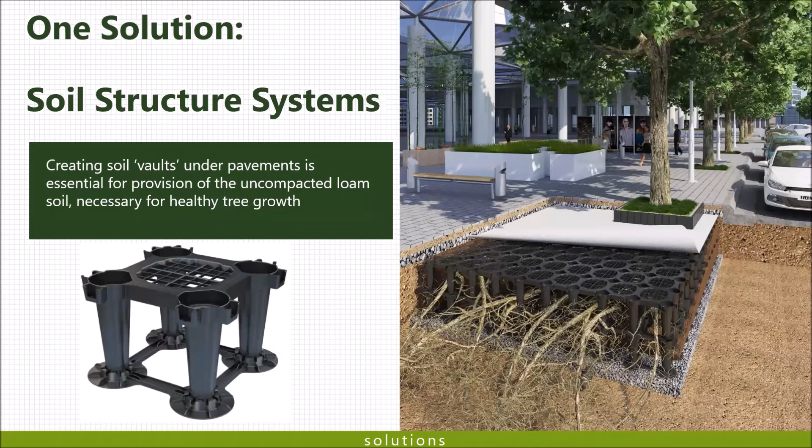So this is our soil cell product here. This is a Stratavault 30. As you can see, this product sits underneath the sidewalk or underneath the road, and it's a structural product. It also has void space within the modules, within the matrix, and this void space is for soil for the trees to use, so their roots can spread throughout the soil.

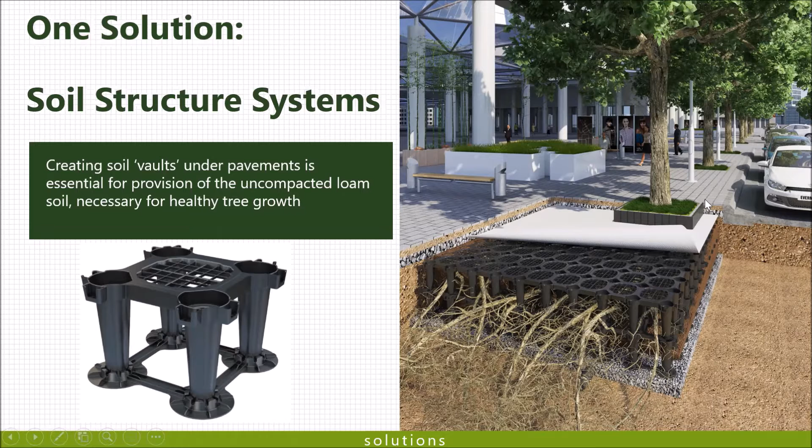Now, as mentioned before, we had a 4 foot by 4 foot square hole in the sidewalk. With the use of our system, we're actually providing sometimes 500, sometimes 1,000 cubic feet of soil per tree within these systems, which means these trees are now going to grow from a 3 to 5 year life expectancy to 50 to 70 years.

So it's a pretty simple concept. They are literally just, if you want to call them, plastic milk crates that have structural capability of supporting the sidewalk with a void space within them.

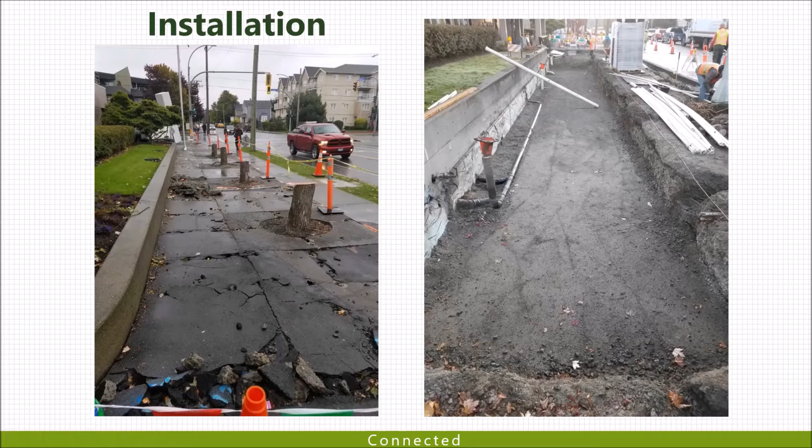Image on the left, our base plates are down. That's the first thing that happens here. And then we add the actual product into the base plate, as you can see there.

Okay, and we keep going. We have bridge connectors, and eventually it becomes here what you see on the right hand side. So this is one complete layer of soil cells now, and the square holes are there.

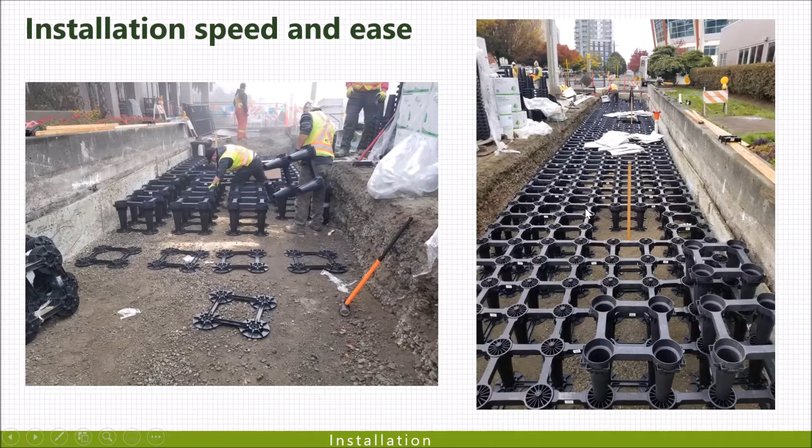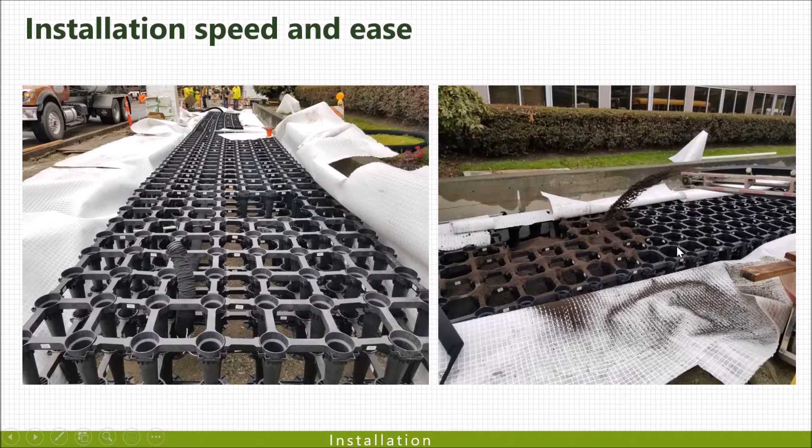Now the image on the left completes the Stratavault 30 installation. The top grates are in place now, and again this square is where the tree will be going. And now what we've done is, because we've filled it with soil, we've folded the geotextile membrane over the top, and there's a 12-inch overlap here. This is now ready for us to pour the granular gravel layer on top of this and compact it.

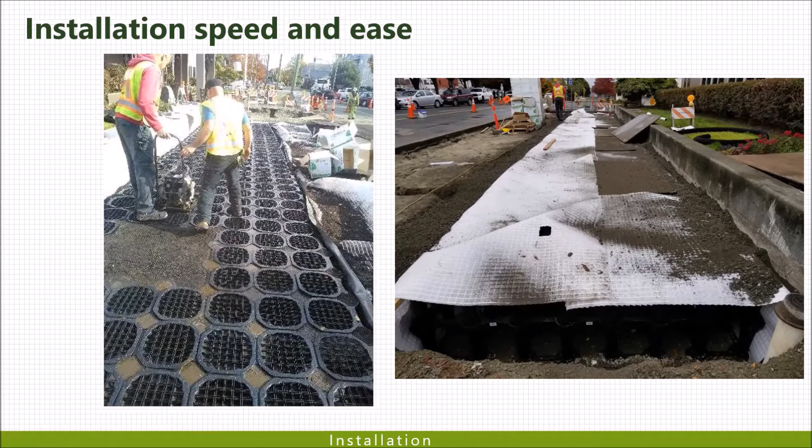So that is just what we've done. Here's the granular layer on top, and this is again about 4 inches of granular compacted to 98%. And then the image on the right is the project now completed. We've only put 2 trees back into space because the canopy of these trees are going to far exceed the 4 that were there before, so we don't need as many trees.

And just to go through the idea of why we use these soil cells again, this 4 foot by 4 foot tree grill here was the way that we used to plant trees into sidewalks. I say used to, we're still doing it now in some municipalities. But now instead of this, these tree roots have got all of this room here, all the way underneath this massive sidewalk, and this is all full of soil. So these trees can now expand through all of this, and that means their canopy can grow and the tree can grow to live to be a fully mature tree, providing all of the shade, aesthetics and health benefits that we require it to.

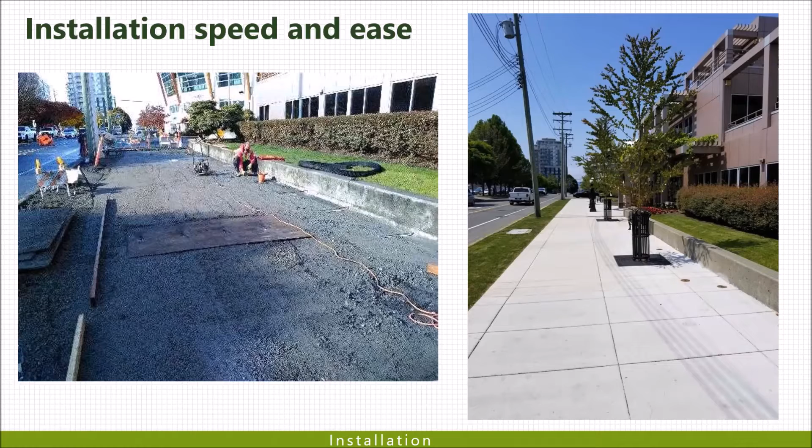Okay, now I'm going to look at stormwater management quickly here as well. For those of you that are really getting started on the whole soil cells for trees concept, you can even potentially close your ears at this point.

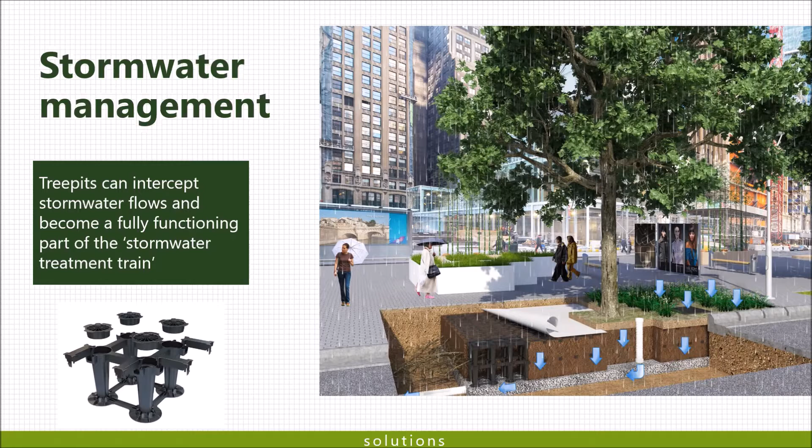But this is a really interesting development that's been happening over the last few years. So we are actually sending our stormwater - we've got lots of stormwater on this road here. Obviously it picks up lots of oils, metals and petroleum pollutants. And what we've been doing now for a few years is sending this stormwater into our catch basins. The catch basin might be against the curb, or it might be in the center of the road, doesn't matter, it just depends on the municipality. We've been sending that stormwater down into the catch basins and then eventually into our city systems, into our rivers, oceans, which is causing big problems.

A, because the water is typically got some pollutants in it, so we're sending all this polluted water into our city systems and into our oceans and rivers. But also a lot of times the pressure that's going in because of the heavy rainfalls we're getting, we're actually blocking up the pipes or applying too much pressure, where we actually see manhole covers flying into the sky. I've seen it happen a couple of times up here in Canada certainly, and I'm sure it happens down there a lot in the States.

So what we've developed is a way of sending the water through the catch basin into pipes which lead into our soil cell systems. And again, this is a win-win. There's 2 reasons why we do this. The polluted stormwater that's coming through these pipes is, A, feeding the trees, so the trees can keep getting water and keep growing, and B, the soil and the tree roots are actually cleaning all of the pollutants out of the stormwater. So it's a really fantastic natural way of cleaning this polluted stormwater.

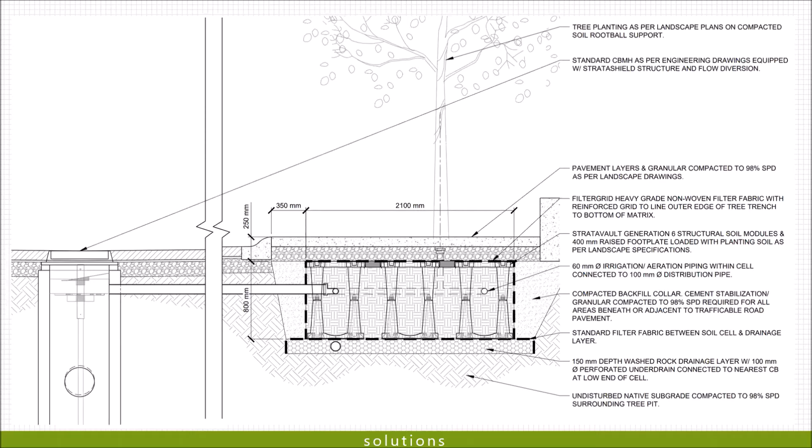We've got another system I'm not going to talk about today, which takes the silts and sediments out of the stormwater before it reaches this pipe. This system will be sold by Cascade Geosynthetics, so I don't have time today to talk about it, but if you have questions afterwards, certainly ask. The concept is we run all this stormwater underneath our sidewalks into the soil, and the soil cleans the stormwater and produces nice, big, healthy urban street trees.

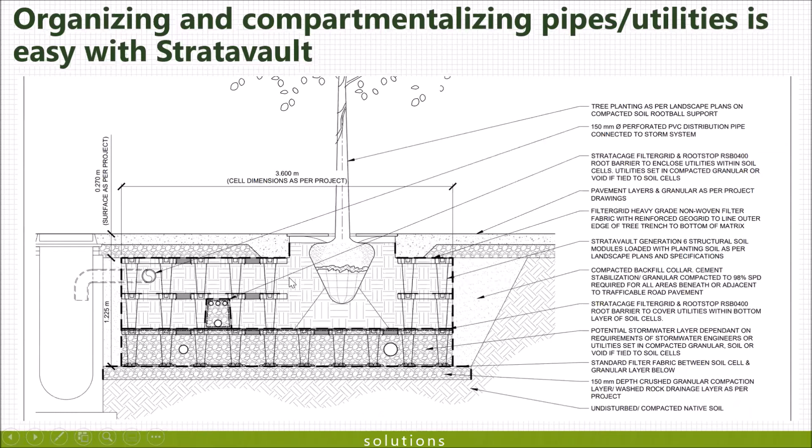These soil cells are also used by engineers to organize and compartmentalize pipes and utilities underground. This particular project is in Seattle. The bottom row of soil cells is for stormwater - the stormwater engineer wanted to know how much room they have for water, so we allocate that whole bottom row. The second level up is for compartmentalizing and organizing utilities, pipes, gas mains, and that kind of thing. The top area is all soil for tree roots. These are a fantastic way of organizing all the space below the sidewalk.

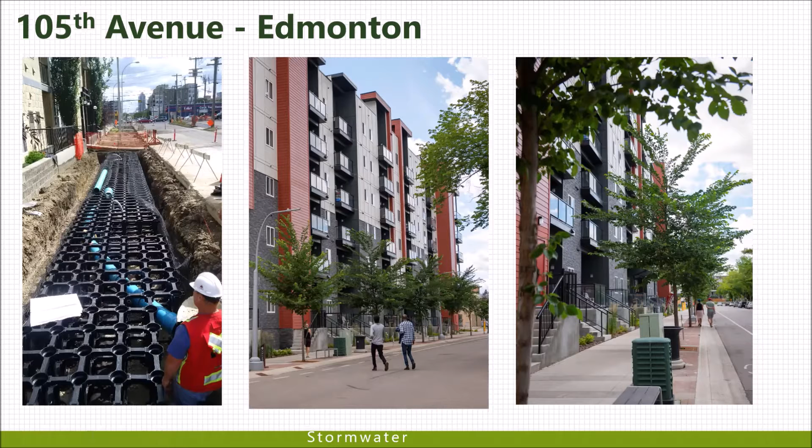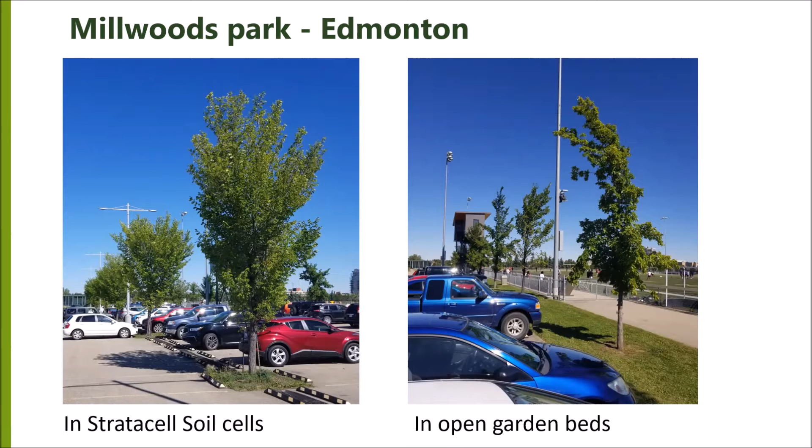This is a parking lot project - very cool, we actually use this one as a case study. The trees in this parking lot, in the soil cells, are actually outgrowing the trees in the open planting areas with soil and grass. We don't often get case studies this close together, so you can do a side-by-side comparison. The trees on the left are doing so much better than the trees on the right - this is the same tree species planted at the same time, which is important to note.

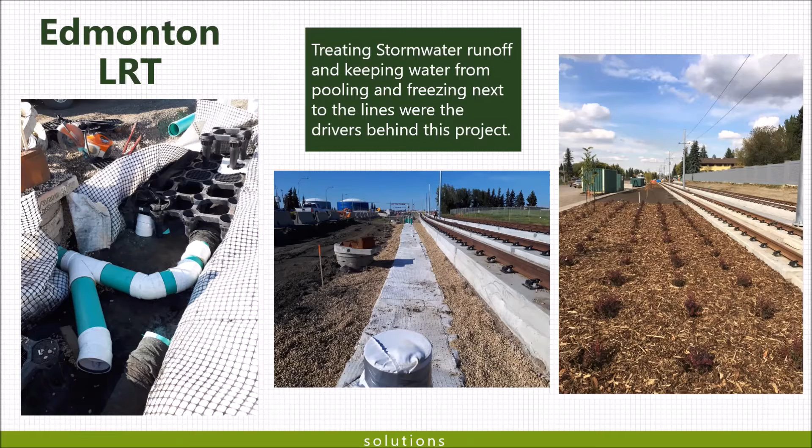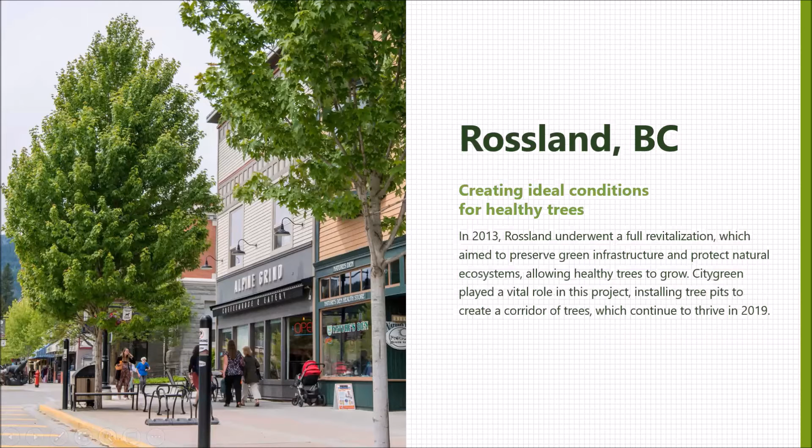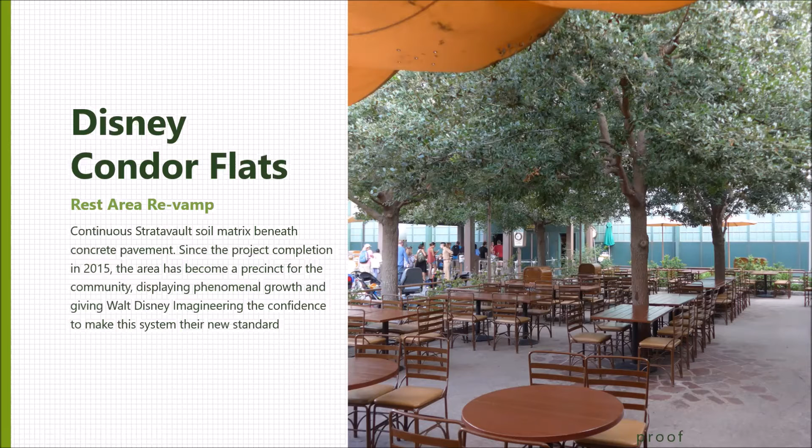Now, this is very good in case there are any people from municipalities on this call today.

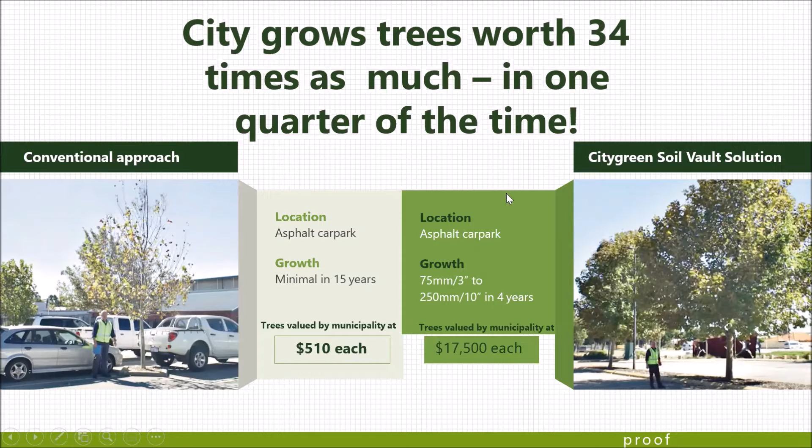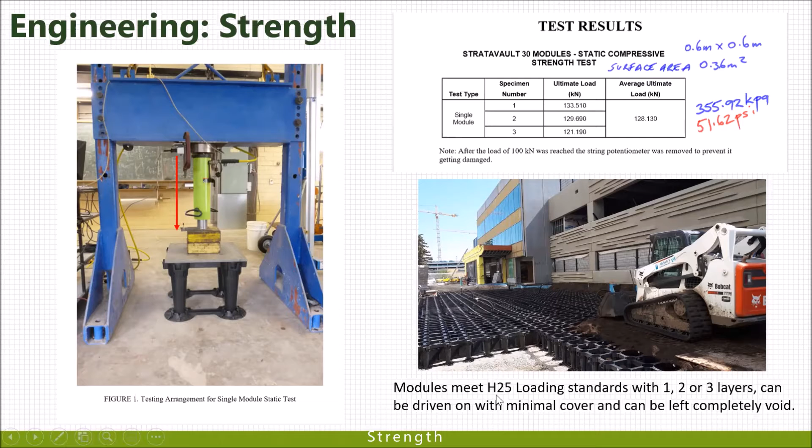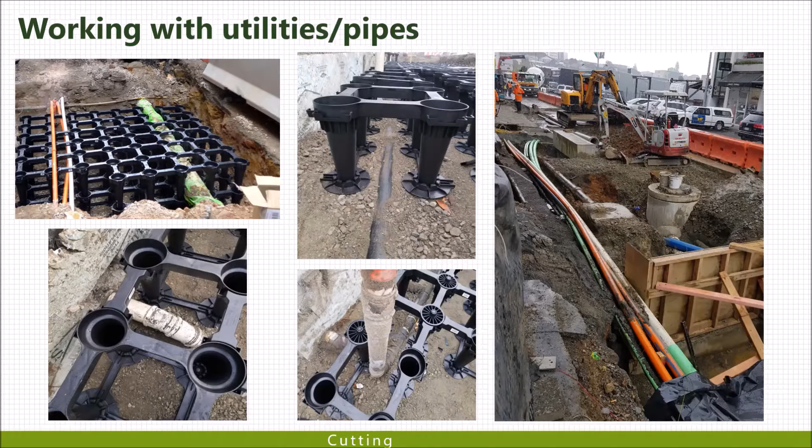Working with utilities and pipes, we worked very hard on the patent of being able to do this, and this means we can basically cut our system without compromising its strength. Really important when we're looking at underground infrastructure, pipes, utilities, that kind of thing.

Our system, as mentioned earlier, is made with 100% recycled plastic. We saved over 1,000 tons of plastic from landfills and oceans last year alone. I'd love to touch on more of this information because we're very proud of it, and we really like to put money into other objectives that serve this.

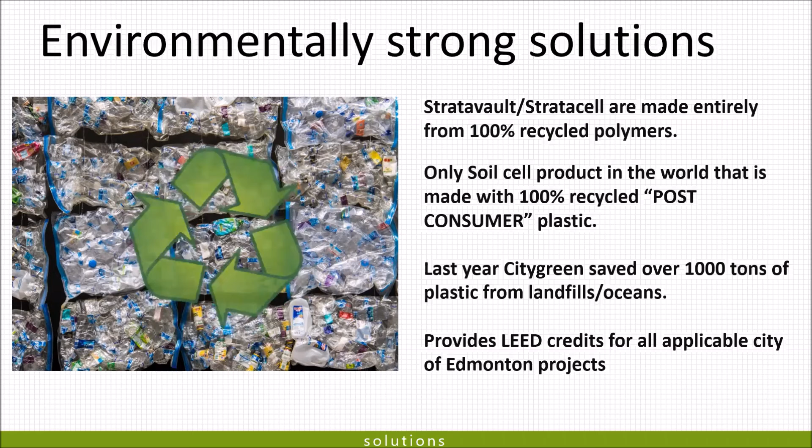Obviously LEED credits as well. If you have any LEED credits on your projects, we can help with that too—31 in total.

Some of the benefits, I'll let Melissa talk to this, but some of the benefits we're working with ourselves and Cascade Geosynthetics include stock on hand in Portland, Oregon, trained experts working for Cascade Geosynthetics and myself just north here, and constant education provided by the staff at Cascade and myself to landscape architects, but also landscape contractors, which is really, really important.

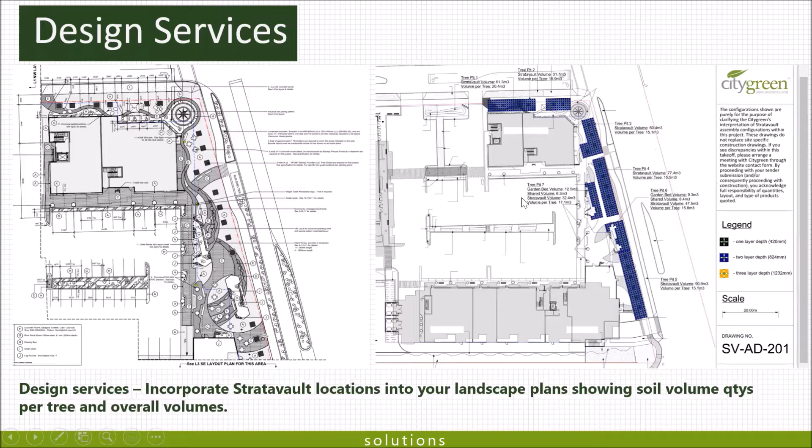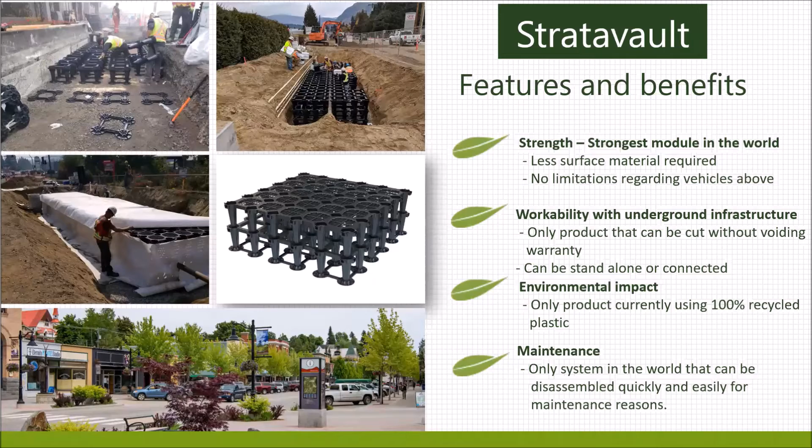And there are more and more cities that are getting into these green programs.

It's really easy to look at this and go, you know, what's the big deal? It's a sandbag and a clip. It's actually closer to concrete than it is to a sandbag. So I'd like to talk about how it's similar to concrete first, and then we'll talk about how it's unique to all other systems in the market.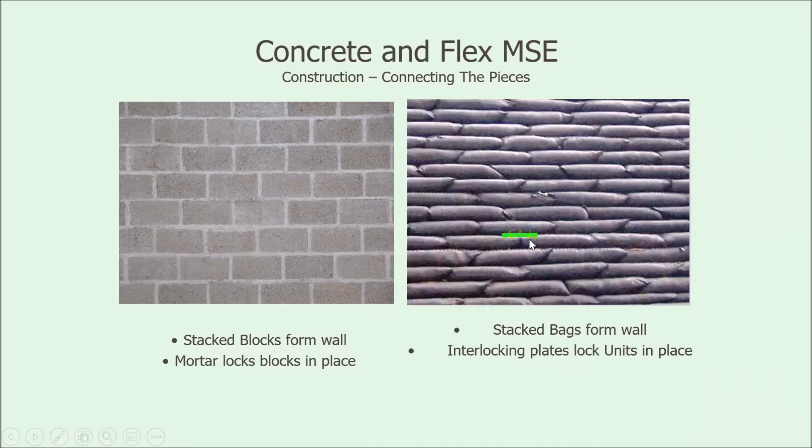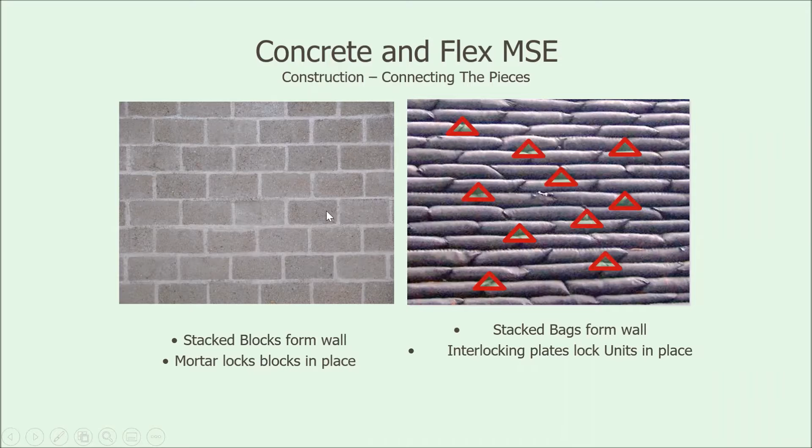Like concrete, you stack in an offsetting pattern, so you create that running bond up the wall. Our interlocking plate bridges the joint between two bags, so that when your subsequent row comes in, it centers over the plate and creates a mechanical connection. So you'll have hundreds or thousands of these individual connections throughout the wall, much in the same way that mortar or pinning might with other systems.

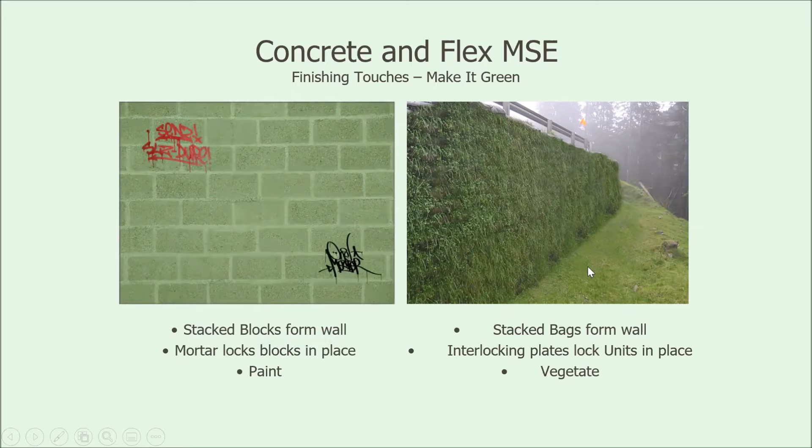If you want to make a Flex MSE wall green, you vegetate it. There are a number of ways to vegetate the system, whether it be grasses, trees, or flowers. We get into that a bit as we go. If you want to make a concrete wall green, you paint it, and then you come back in two weeks and paint it again. So if you're designing for public space, perhaps graffiti and that type of vandalism is an issue. With Flex MSE, if somebody wants to graffiti this, well, they'll just hedge clip it off and move on. So that's really where the similarities end.

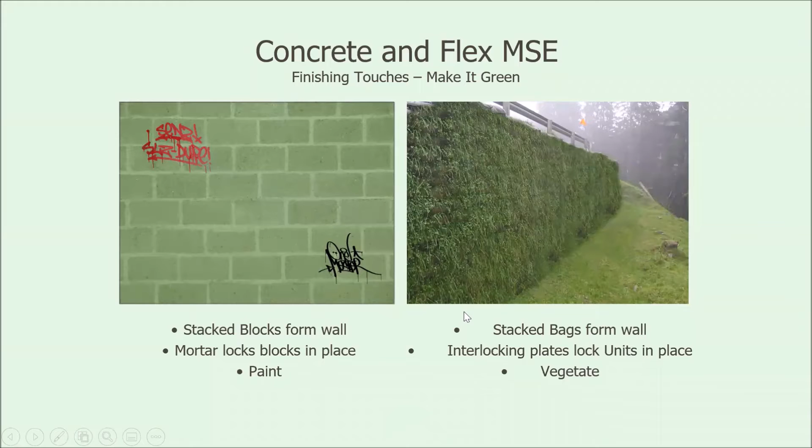Let's talk a little bit about how Flex MSE is unique to all other systems in the market. It can be installed anywhere from horizontal, for channel cladding and outfalls, that sort of thing, all the way up to pure vertical as a living wall, where you're attaching to an existing structure. We typically see ranges from 1 to 1, so 45 degrees, to 1 to 10, 85 degrees. The nice thing is it's the same two components regardless of your batter, so you're never getting that panic call from a job site saying, oh, I need a plate B with a bag C because the grading has changed.

It's able to withstand almost unlimited differential settlement. So for the Pacific Northwest, where seismic concerns are there, Flex MSE is an ideal system. Over a 30-foot stretch, the system can settle up to 6 feet without failing. We were able to determine this through FLAC analysis, which is earthquake analysis, where we modeled 30-foot sections of Flex MSE, of earthen berm, of basket, of block, that sort of thing, and then ran simulations from a 4.0 to a 9.0 with liquefaction. We were able to withstand that entire range, and the maximum settlement was 6 feet.

This is really great for seismic zones, but it's also great for areas where you might have just soft soils or less than ideal soils. If you had a little bit of settlement with Flex MSE and you were satisfied it was stabilized, it's very easy to add a couple bags to the top of the wall, revegetate it, and move on. With a hard armor system, you're resetting the entire structure.

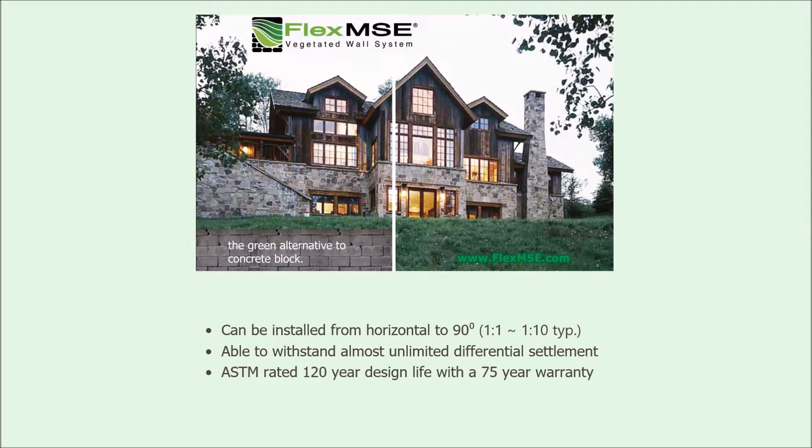Qualifies for up to 21 LEED credits in 4 categories if you're building to LEED. So you can imagine these are very valuable credits.

Uses 97% less greenhouse gas than concrete, 98.5% less than steel. So if your project requires you to reduce your carbon footprint or reduce greenhouse gas, Flex MSE should definitely be part of that conversation. We use 50% recycled content in our manufacturing, and the system is 100% recyclable. So even if you're using it for temporary works like temporary weirs or dams or even preload on the site, once the load cycle's over, you can recycle the bag and plate 100% and close the loop.

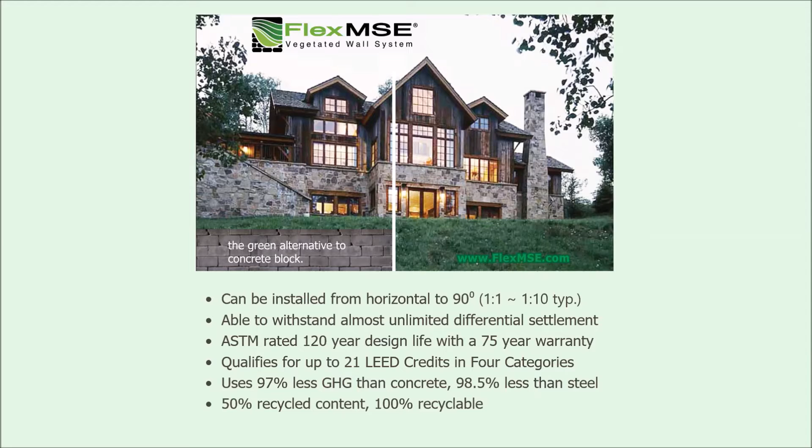System installs in 2/3 the time of a typical wall. On your first installation, you can get it down to about half the time by your second installation. So we all know time is money and money is money. We come in at 60% the cost of other systems. Typically when you're talking about something this versatile, this green, you expect to pay a bit of a premium. We actually go the other way where we're nearly half the cost.

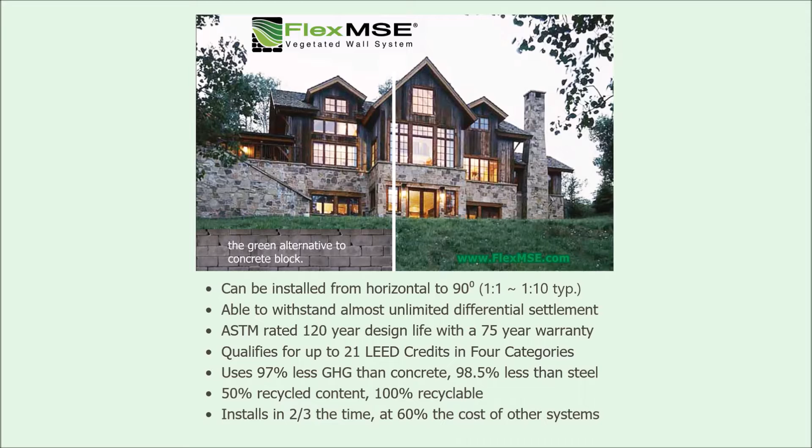So let's talk about some of the applications for Flex MSE, the places you can use it. For infrastructure, DOTs all over the world use Flex MSE in a variety of ways.

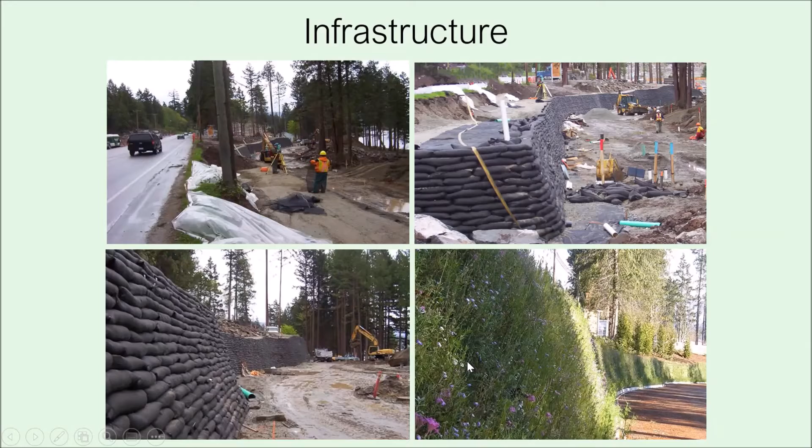This example here, this is a 30-foot tall 4-lane roadway built on the system. Pretty incredible. This is a very challenging site, old growth forest, fish-bearing stream here, about 6 feet of laydown on either side. The site was so tight, in fact, that the fellow that's hydroseeding here is actually hanging off a crane because they couldn't get equipment down that could lift them up high enough.

This was originally specified as a concrete block wall. In order to go up 30 feet, they would have had to go down 6 feet to embed the toe. With Flex MSE, the maximum embedment we see is 12 inches. So we trench down 12 inches, 6 inches of clear crush for drainage, and then your first row of Flex MSE and you're back at grade. And then you can construct as normal.

So very limited site disturbance. You're not hauling a lot of stuff away. You're not bringing a lot of stuff in.

Other areas that we do a ton of work in, anywhere land meets water. So this is ideal, and we accomplish 3 major things for waterways folks. One is we don't create a heat island, so we're not heating the water up. Two is we don't leach anything ever, so nothing leaches from the bags, but we also create a barrier to prevent silt and sediment from leaching through into the waterway.

And silt and sediment are the number one pollutants for water in the world today. The third thing is we're able to restore the riparian zone very quickly here. So there was a failing timber crib wall here, reconstructed with the system, freshly hydroseeded here. And then you can see this is after a single growing season. The last photo here shows a pretty typical storm event for the site, with flows up to 25 meters, or 25 feet per second, and lots of volume. The system can withstand all of that.

This little example here, this is a creek where they would have mudslides come in and choke out this little creek. They reestablished the banks here. They have a little head wall with a walking path above it here. And then this bottom photo shows the same area 2 years post vegetation.

So they planted ferns right into the top of the bags and the system has completely disappeared. I like to say the nice thing about Flex MSE is in a short period of time it disappears. The bad thing is in a short period of time it disappears. So, lots of photos, get people out early if you want to show off your work, because the system will disappear into nature.

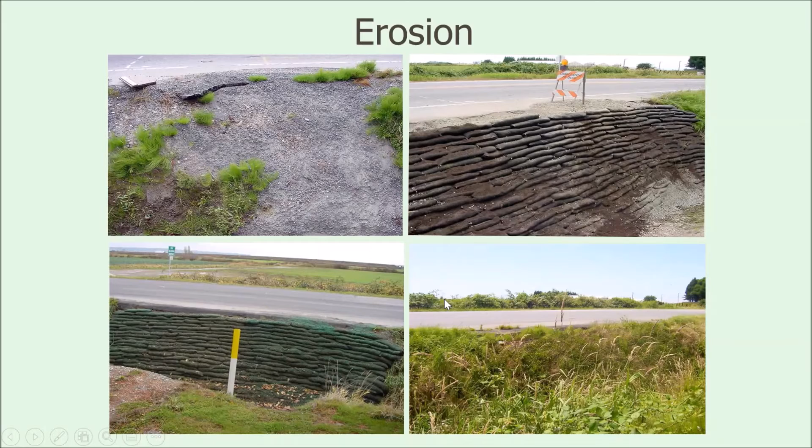Another area where we do a lot of work is erosion control. So whether it's a small site like this one, a water event took out the side of the ditch, created a shallow slope failure, but the compacted road base was protected. Four workers from the city showed up and were able to gravity stack Flex MSE here, hydroseed it the next day, and then they're back to nature. Very easy in and out of this job in about 4 hours, showing the rapid installation of the system.

This one was just recently finished in Auckland, New Zealand, where mudslides took out this whole section of road. They rebuilt it, reestablished the roadway, and you can see some early growth there on the repair. We have updated photos now where it's fully grown in, looking amazing and performing the function. So for erosion control, that rapid deployment and the ability to green up again is a great advantage.

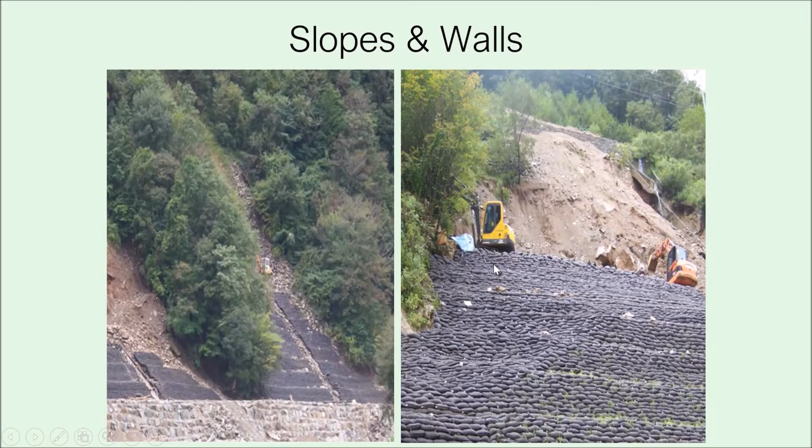With slopes and walls, this is one of our big areas. This slope here is our tallest installation to date at right around 70 feet. This fellow in the middle is also on the left-hand side there - busy highway up top, water down below. They staged everything off-site and then barged it into the toe of this wall, and they went up 6 feet at a time until they reached the top of the slope. Incredible work here, and they were able to save the slope from further erosion.

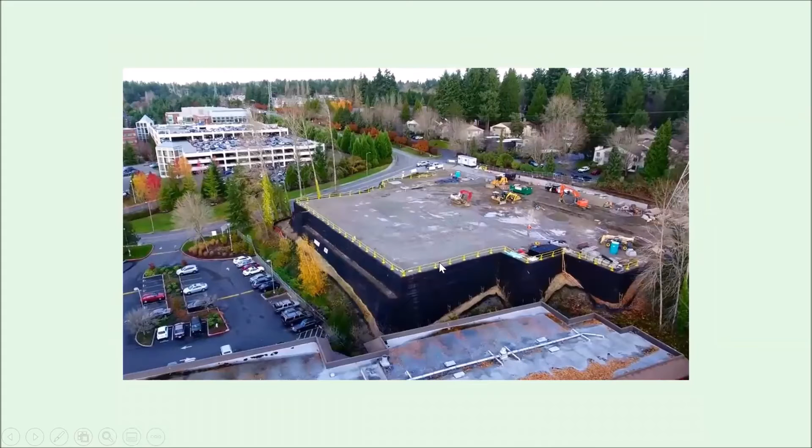Other applications - this is our tallest pure MSE wall to date, getting close to 40 feet tall. Very tough to get a single shot of this site from the ground, so we have a few snaps from drone footage. This is the building site for a 3-story, 147 resident memory care home in Kirkland, Washington. Very challenging site. The engineer could not make block or basket work here, primarily because there's an enormous stormwater containment chamber in the backfill zone, so the grid runs he was trying to get, 25, 30 feet runs, he just wasn't able to achieve.

One of the nice things about Flex MSE is that we follow the same conventions as other engineered systems, where you have 60 to 80% of your overall height embedded every 2 feet of lift. So every 4th row of Flex MSE, you would have a grid run going back. Because Flex MSE is modular, what the engineer was able to do in this case was go back every 2nd or every 3rd lift instead. He increased the number of intervals going back without having to increase the length, and was able to make the math work here.

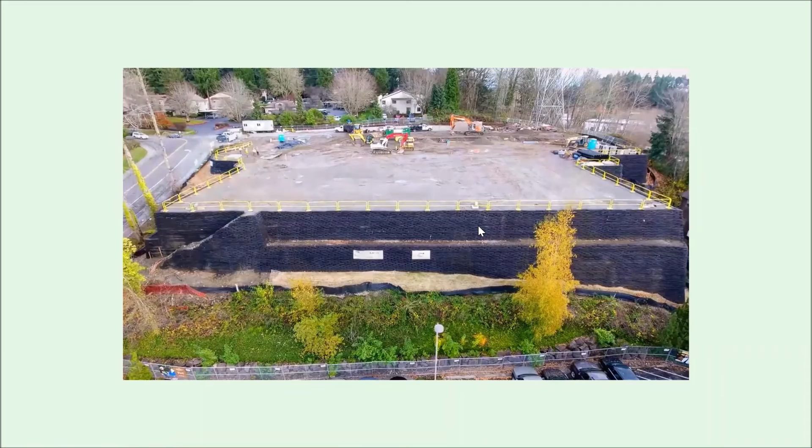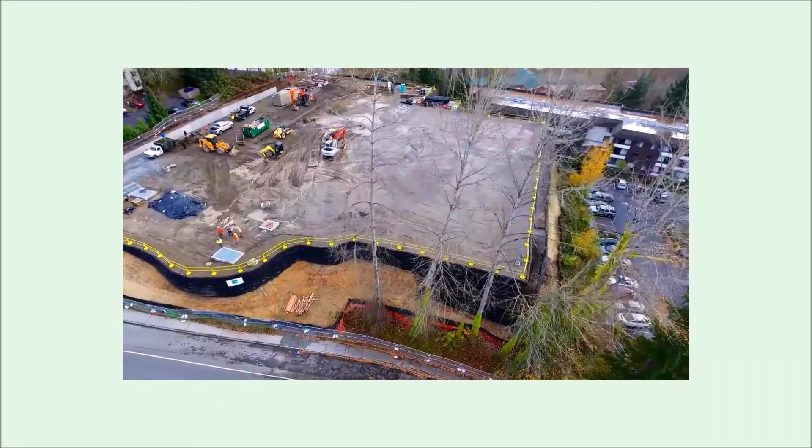This site is now complete. There's a building within 5 feet of the front edge of this wall here, a poured pad building. During the build, they encountered 2 major events - one was a 3.4 magnitude earthquake, and the other was they set 3 rainfall records in a row while constructing. The face of this wall was surveyed throughout the build, and there was 0 movement recorded. Very stable, survived the worst we could see, and now it's fully constructed.

Landscaping is an area we do a ton of work in. Whether it's public space, parks, that sort of thing, the ability to follow an organic line or go over rocks and stumps is a real advantage of Flex MSE for that aesthetic side of things. It doesn't impact the integrity of the system and looks great at the end.

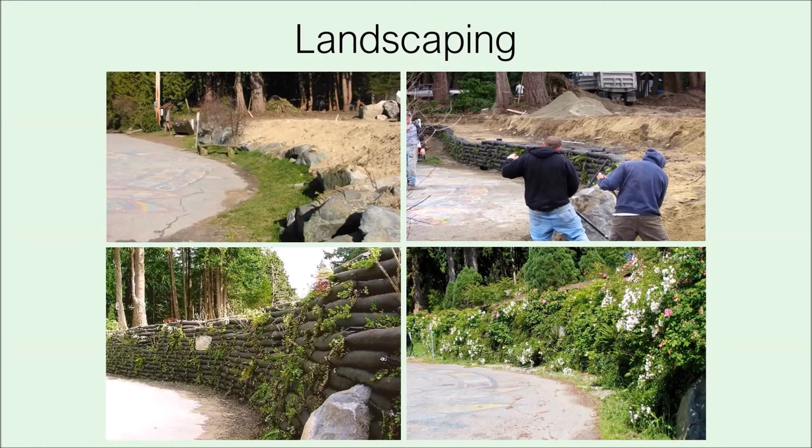Things like high-end residential - these folks here had a very steep lot with a little tiny house at the top. They raised that, pulled their building footprint out about 3/4 of the lot. They parked their cars here. They've got some massive trees to hold up, and aesthetically, it's amazing.

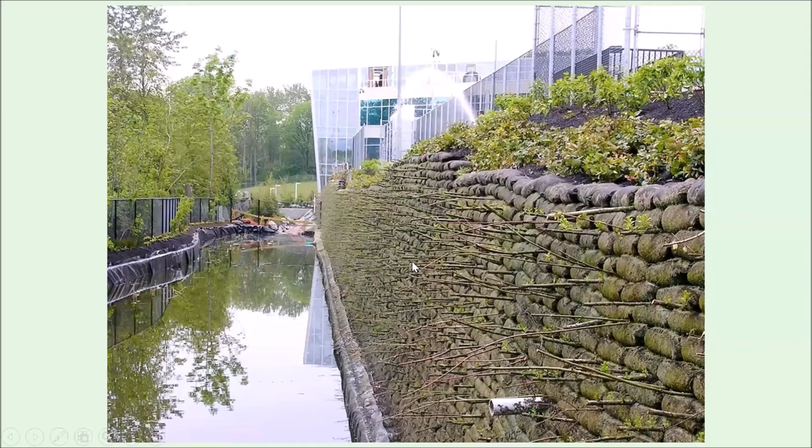This is the first gold LEED certified building in Canada. This is EA Games, the video game company - this is their headquarters. This wall is 600 feet long, and the batter on this wall changes 6 times over the course of the wall. They've got a soccer pitch, a tennis court, a basketball court, and a park above this, so the top of the wall could accommodate those changes while the bottom was snapped to a line.

This is live staked with willows. The process is somebody with a little piece of rebar and a mallet creating a void between the bags, and then another person following behind filling those voids with cuttings, splashing a little water on it. 45 days later, they're looking pretty good. These are now 20-foot tall willows - they look really great, very mature. The nice thing about a willow is it has a rhizomatous root pattern, much like grasses, so it's actually adding further strength to the backfill zone and keeping the face looking good.

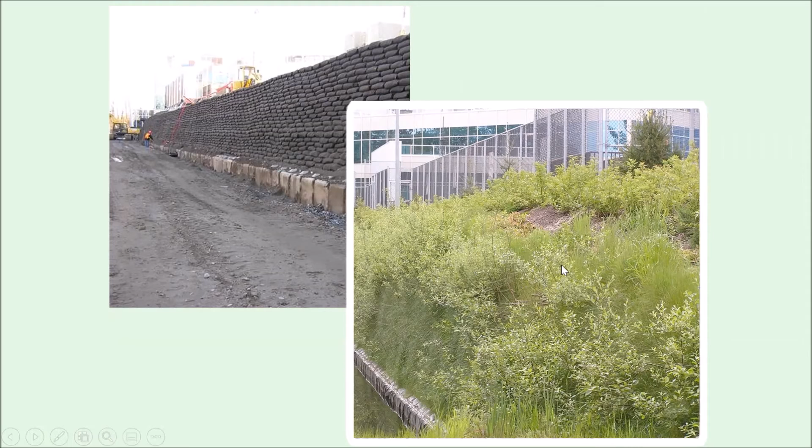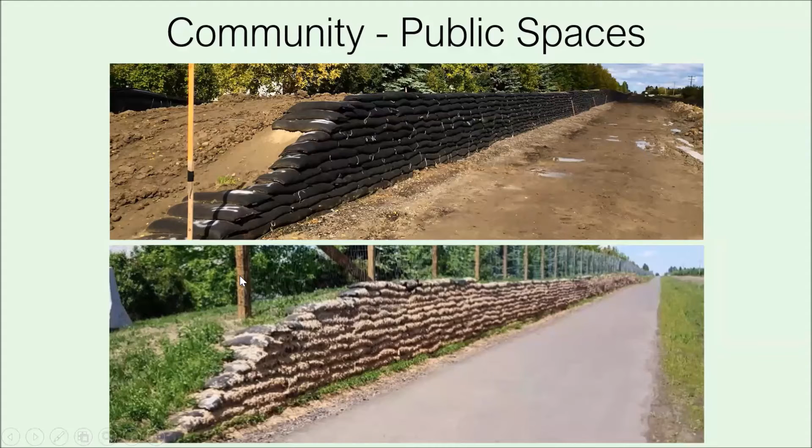Community and public spaces - whether it's this 1.5 mile long sound barrier to prevent road noise from hitting the subdivision, or trail systems. We do a ton of trail systems, whether it's a new cut-fill type trail system or a repair like this one. They had a failure here, were able to reestablish the trail, re-engage all of their fencing, and match the vegetation that was there before - really nice work there.

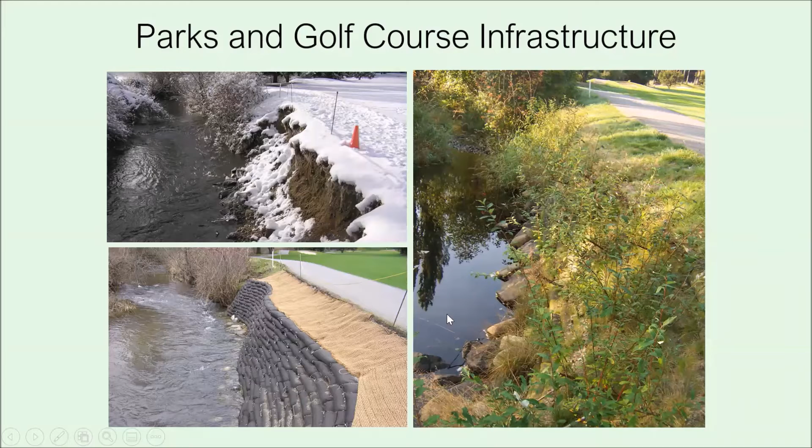We also do a lot of work with parks and golf courses. I like this one because you have a cart path that was in jeopardy of slipping into the creek. Rather than bring in a hard armor system, which would have flattened this surface and potentially created erosion downstream or sped up the water, they were able to match the original profile of the bank and plant it with native varieties. So the flow didn't change, it looks very natural, and they were able to protect this little cart path.

I want to talk a little bit about filling and construction, so you get an idea of what goes into it. You could fill the units with a pile of dirt and a shovel. We also have plans for filling jigs on our website, free to download - you can fill 18 units at a time using a yard bucket. A 3-person crew can fill 600 units a day, and if you need 1,200 units a day, you build 2 more jigs and add 2 more people. There's lots of bag filling machines in the sandbag industry - this one will fill 3,000 a day. It's automated, hopper fed, sews it, spits it out the back, so you can be ready to go.

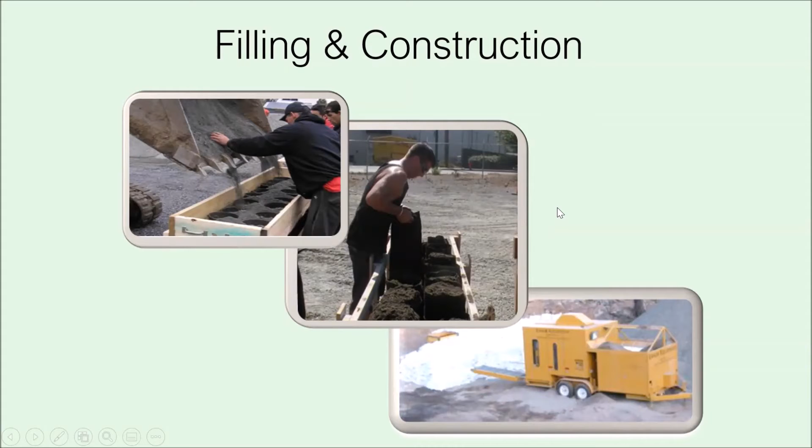For construction, we're the only vegetated system in the world that certifies installers. Our certification course is free and online - I'd encourage you all to take a look at it. It will help not only with building beautiful walls, but with bidding Flex MSE projects in reality, because once you understand what goes into the system, it's very easy to start to bid it.

Construction is very simple - you just need a relatively flat base. First row of plates goes down, first row of bags centers over those plates. Then you bridge the joint between each bag with another plate, offset by half a bag, center over the plate, rinse and repeat - it's a very simple system. I've seen professional wall builders really screw this up because they overthink it, thinking it needs to be plumb and square and perfect. Flex MSE is very forgiving and can work with all sorts of site conditions, so definitely check out the training.

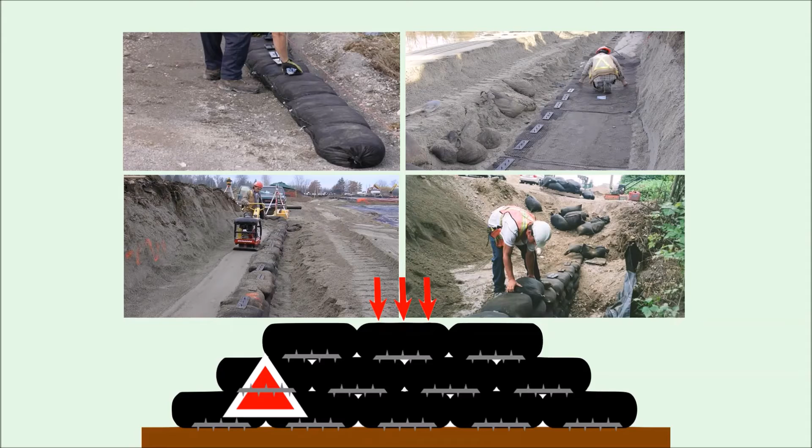For vegetation, hydroseed is still our most popular method.

We recommend using a flexible growth medium, something like Flexterra, that sort of thing, which will allow adhesion to vertical surfaces for up to 18 months, we found. If you come in with straw or paper mulch, the overnight dew will typically just peel it off. That stuff's great for horizontal surfaces, but not so much here.

We also allow for 20% of the face to be cut for vegetation, whether it's inverted T-cuts for larger plugs or dibber punctures for smaller plugs. You can be really creative with your planting. If you're installing near water, or you don't want to cut open your bags, you can also brush layer, where you're setting in your root wad behind the face and running the plant out between the bags.

And it's this deep root web penetration that, once the vegetation is established, Flex MSE just takes on a life of its own. So you're not out there revegetating and maintaining it as much as you would with other systems.